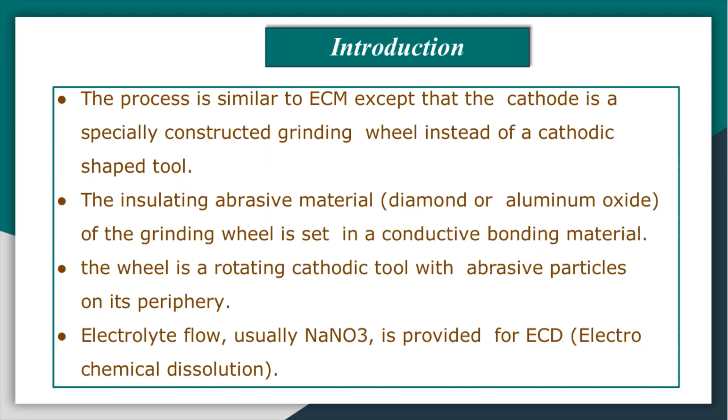In this technique, it utilizes a negatively charged abrasive grinding wheel, an electrolyte solution, and a positively charged workpiece. As I have shown in this figure, you can see the grinding wheel is there, the electrolyte is there, and the workpiece is there. The process is similar to electrochemical machining, except that the cathode is a specially constructed grinding wheel instead of the cathodic shaped tool like the contour to be machined by electrochemical machining.

The insulating abrasive material, that is diamond or aluminum oxide, of the grinding wheel we have to set in a conductive bonding material. In this technique, the non-conductive abrasive particles act as a spacer between the wheel conductive bond and the anodic workpiece. Depending on the grain size of these particles, a constant inter-electrode gap, that is IEG, of 0.25 mm or less can be maintained, through which the electrolyte is flushed. So we have to flush out the electrolyte in that gap. The abrasive particles continuously remove the machining products from the working area.

So in this machining system, the wheel is a continuously rotating cathodic tool with abrasive particles of 60 to 320 grit number on its periphery only, and electrolyte flow, that is NaNO3, we have to provide for the ECD purpose. The wheel rotates at a surface speed of 20 to 35 meters per second, while the current you have to maintain between 50 to 300 ampere. So this is about the basic working principle of electrochemical grinding.

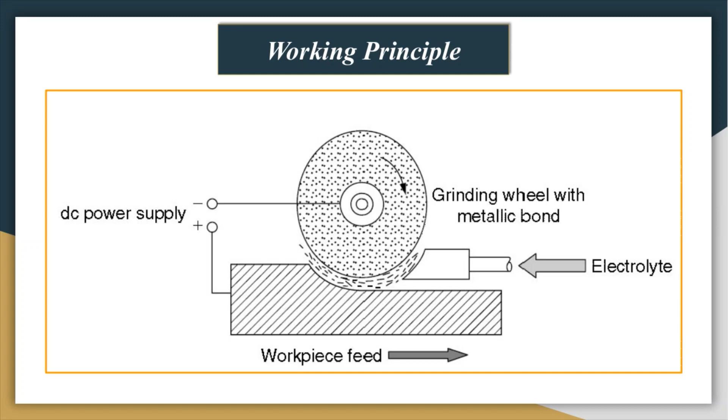Okay, let us move to the electrochemical machining system. When a gap voltage of 4 to 40 volts is applied between the cathodic grinding wheel and the anodic workpiece, a current density of about 120 to 240 ampere per centimeter square is created, and the current density depends on the material being machined, the gap width, and the applied voltage. The material is mainly removed by ECD, while the mechanical abrasion of the abrasive grits accounts for an additional 5 to 10% of the total material removal.

So removal rates by electrochemical grinding are 4 times faster than by conventional grinding, and electrochemical grinding always produces burr-free parts that are unstressed. The volumetric removal rate, VRR, is typically up to 1600 cubic millimeters per minute. So this is the volumetric removal rate you will get from electrochemical grinding.

Now, electrochemical grinding, as we know, is a hybrid machining process that combines mechanical abrasion and electrochemical dissolution. With electrochemical dissolution, the machining rate increases many times. Surface layer properties are also improved, while tool wear and energy consumption are reduced.

Now if you see the figure, I have shown the introduction of mechanical abrasion by a rotating conductive abrasive wheel, which enhances the electrochemical dissolution process, and the abrasive grains perform mechanical depolarization by abrading the possible insoluble films from the anodic workpiece surface. Such films are especially formed in the case of alloys of many metals and cemented carbide. A specific purpose of the abrasive grains is to depassivate the workpiece surface mechanically.

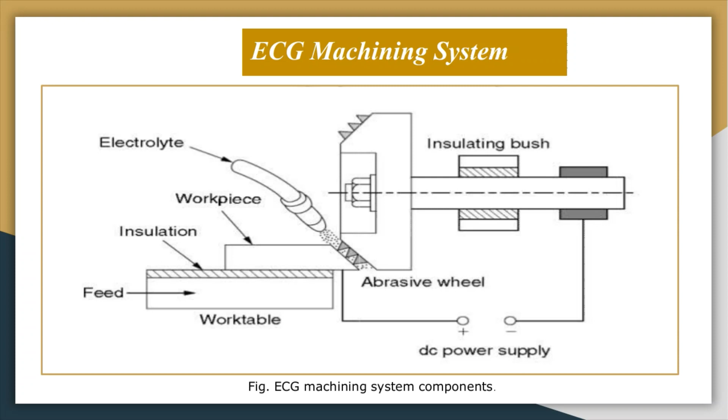In the machining zone, there is an area of simultaneous electrochemical dissolution and mechanical abrasion of the workpiece surface, where the gap width is less than the height of the grain parts projecting over the binder. Another area of pure electrochemical removal, where the abrasive grains do not touch the workpiece, exists at the entry and exit sides of the wheel.

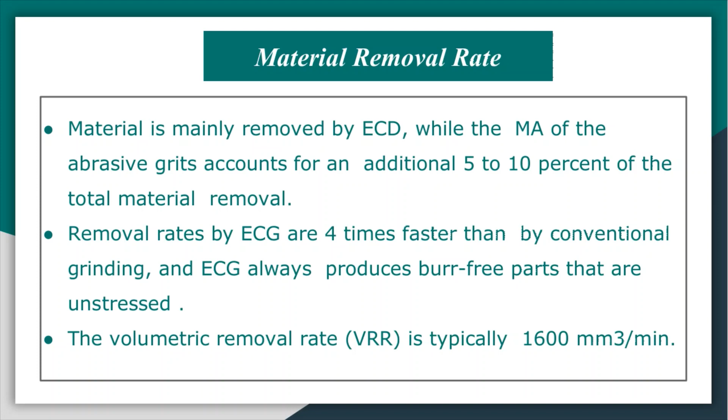Now, the increased performance of the electrochemical grinding process results from the interaction between mechanical abrasion and electrochemical dissolution and changes in the surface layer properties of the material in the machining area. Increasing longitudinal feed rate and wheel speed and a decrease in voltage result in a smaller gap width and consequently an increase in the mechanical abrasion contribution to the MRR process.

So decreasing the feed rate is followed by a considerable reduction in the cutting process, down to values near zero at the transition to pure electrochemical dissolution. So this is about the machining component. So for electrochemical grinding, we require the electrochemical dissolution phase as well as the mechanical abrasion phase.

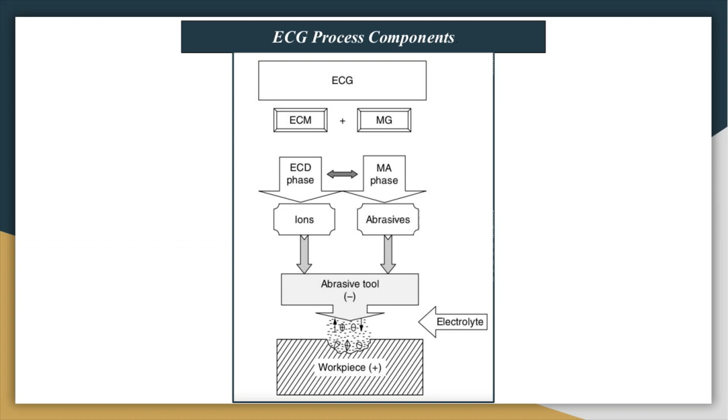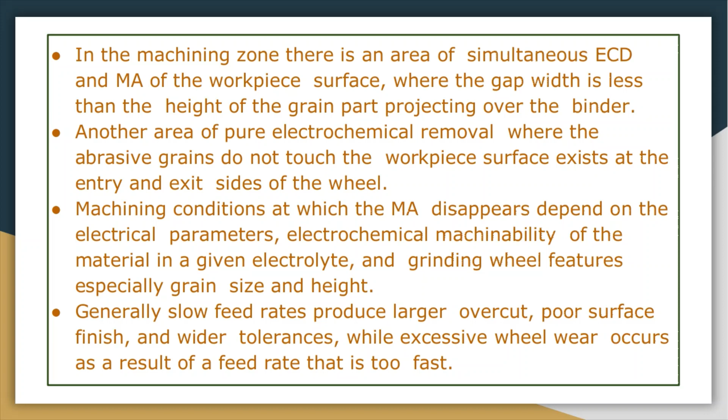Now, the machining condition at which the mechanical abrasion disappears depends on the electrical parameters, the electrochemical machinability of the material in the given electrolyte, and the grinding wheel features, especially grain size and height. So generally, slow feed rates produce large overcut and poor surface finish, and wider tolerances, while excessive wheel wear occurs as a result of a feed rate that is too fast.

Okay. That was the discussion on material removal during this process. Now we'll discuss accuracy and surface quality. Traditional grinding removes metal by abrasion, leaving a tolerance of about plus minus 0.003 mm and creating heat and stresses that make grinding thin stock very difficult. In electrochemical grinding, however, tolerances around plus minus 0.025 mm are easily obtainable. Under special circumstances, a tolerance of plus minus 0.008 can be achieved.

The ability to hold closer tolerance depends upon the current, electrolyte flow, feed rate, and metallurgical properties of the workpiece itself. Accuracies achieved are usually around plus minus 0.125 mm, and the final cut is usually done mostly by the grinding action to produce a good surface finish and closer dimensional tolerances. It is recommended that lower voltage be used for closer tolerances, reduction in overcut, sharp edges, and bright surface finish.

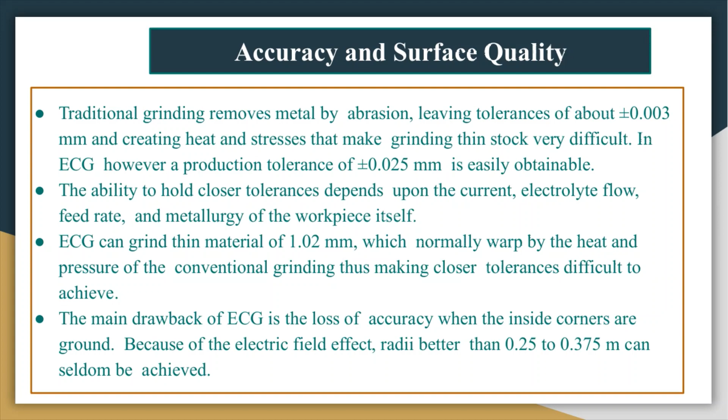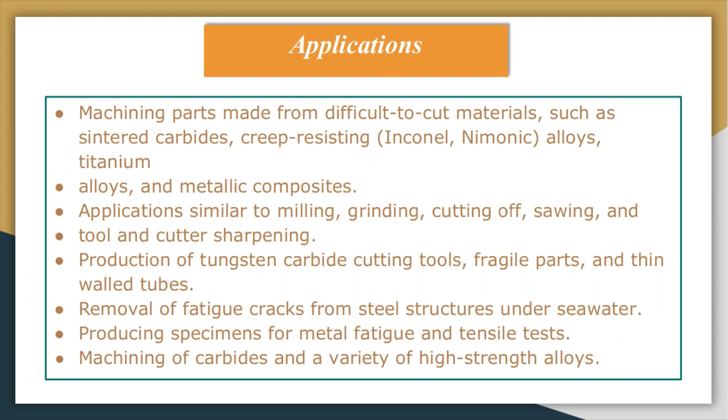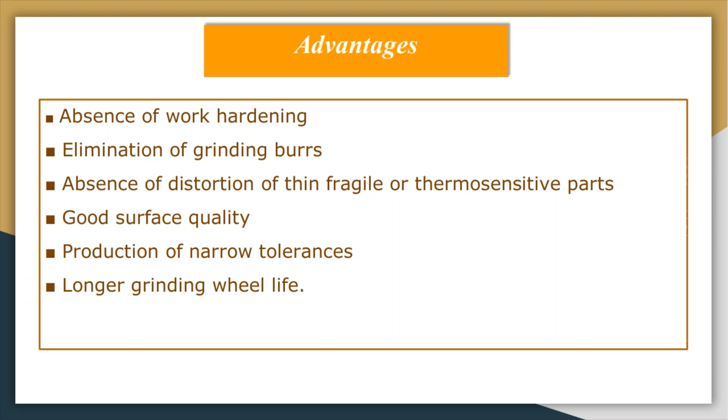The process is not adapted to cavity sinking and therefore it is unsuitable for the die making industry. So these are the applications of electrochemical grinding. Let us highlight some advantages: absence of work hardening, elimination of grinding burrs, absence of distortion of thin, fragile or thermosensitive parts. This technique gives good surface quality and narrow tolerances, and we get long life for the grinding wheel.

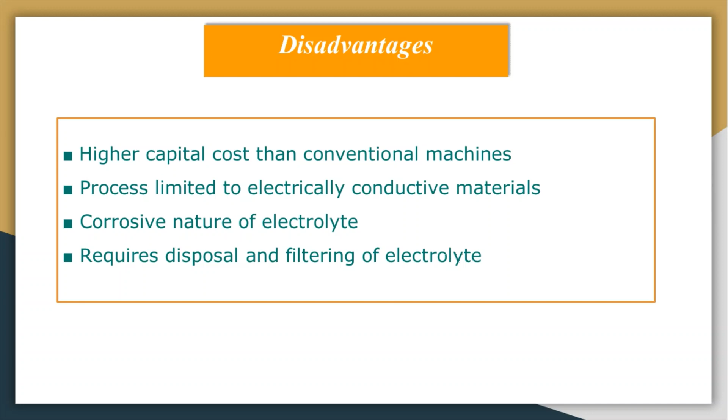Let us discuss some disadvantages. This process requires higher capital cost than conventional machines. It is limited to electrically conductive materials. The electrolyte used is corrosive in nature. And the process requires disposal and filtering of the electrolyte because we are reusing it. So this is about today's lecture.